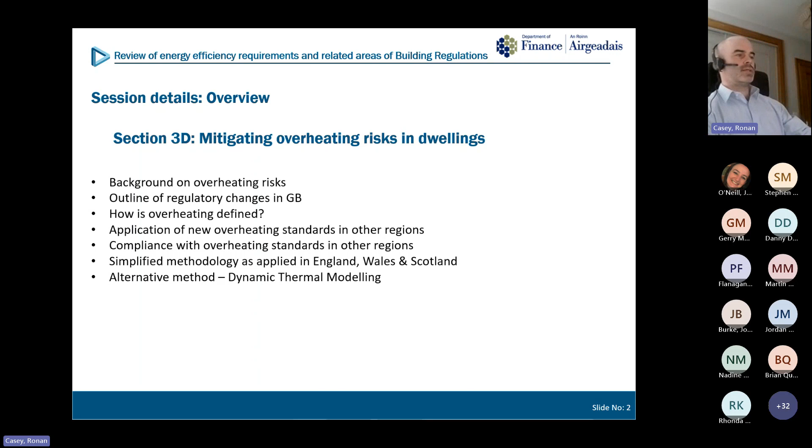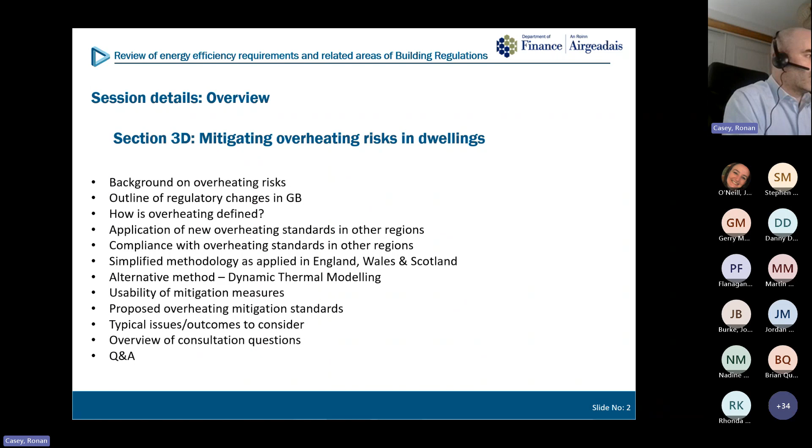This is a brief overview of what we're going to go through today. Firstly, a background on overheating risks, an outline of regulatory changes in GB. We'll look at how overheating is defined, the application of new overheating standards in other regions, and compliance with overheating standards in other regions. We'll go through the simplified methodologies as applied in England, Wales and Scotland. We will look at the alternative method, which is dynamic thermal modelling. We will discuss the usability criteria in relation to mitigation measures. We will overview our own proposed overheating mitigation standards. We will discuss the typical issues or outcomes to consider. Towards the end, we will provide an overview of the consultation questions. And finally, we will hopefully have time to address any questions you may have.

To begin and provide some background on the mitigation of overheating, this section considers the introduction of overheating mitigation standards to the building regulations and associated technical booklet guidance as part of the next phase 3 uplift. The background to this is the report provided by the EAC back in 2018 when they held an inquiry into heat waves and their impact on the UK. The outcome was that their final report recommended that government should create a new regulation to stop buildings being built which are prone to overheating.

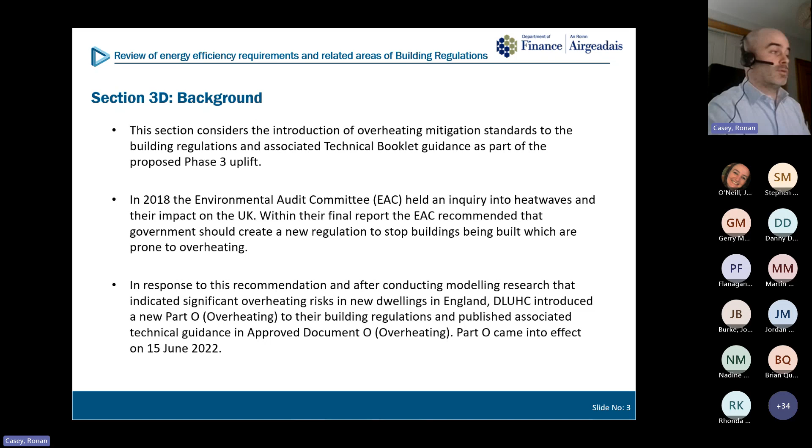In response to that, England have pushed on. They have conducted some modelling, some further research that indicated that overheating risks in new dwellings in England were quite high, and last year, as part of their uplift, they introduced a new Part O overheating regulation and supporting guidance, Approved Document O, which came into effect in June last year. Again, Wales have pushed on, and as part of their uplift late last year, they introduced a new overheating standard, Part O, in November 2022. And again, Scotland introduced a new standard towards the end of last year.

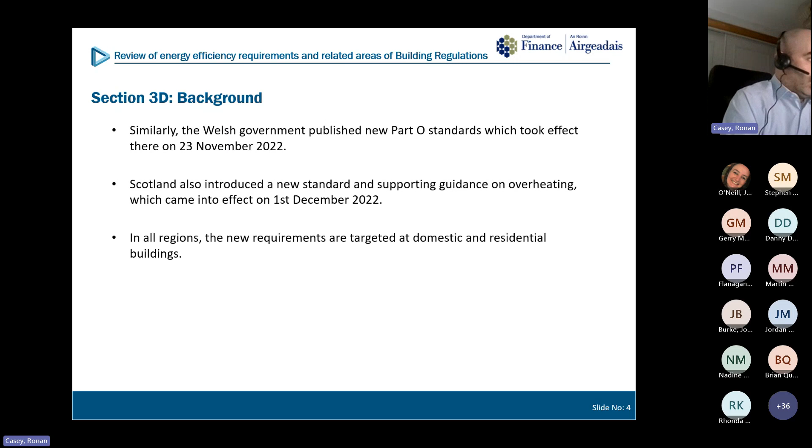In all regions, the new requirements are targeted at domestic and residential buildings. In terms of regulatory changes in GB, the new regulation in England is typical of the requirements in all regions, and it requires the following.

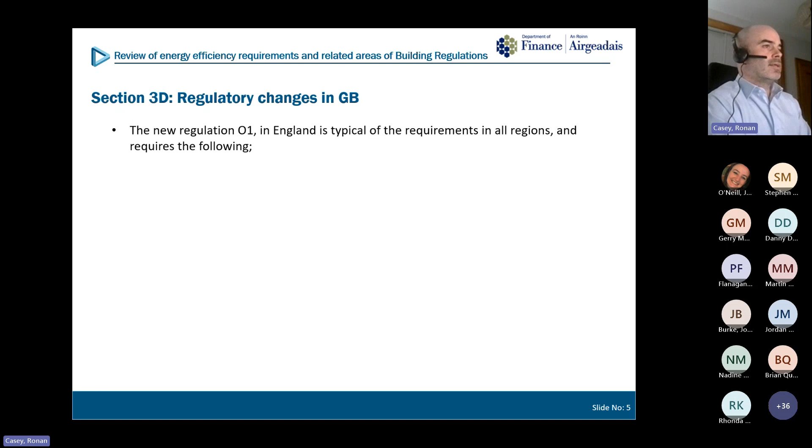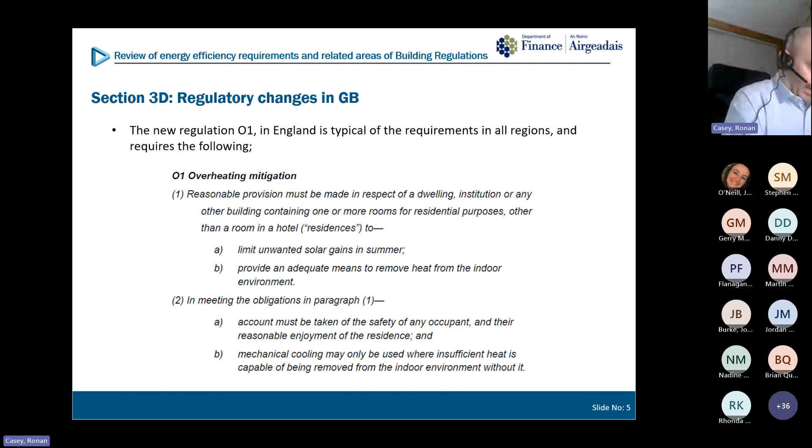Firstly, reasonable provision must be made in respect of a dwelling, institution or other building containing one or more rooms for residential purposes, other than a room in a hotel. Part 1A is to limit unwanted solar gains in summer, and secondly, to provide adequate means to remove heat from the indoor environment. In meeting paragraph 1, account must be taken of the safety of any occupant and the reasonable enjoyment of the residence. And mechanical cooling may only be used where insufficient heat is capable of being removed from the indoor environment without it. So we want to encourage passive means as much as possible.

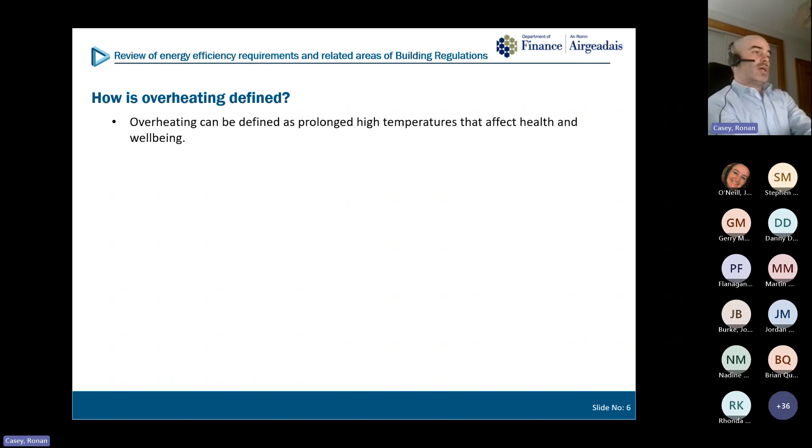So how is overheating defined? Overheating can be defined as prolonged high temperatures that affect health and well-being.

CIBSE have developed the TM59 methodology, the latest methodology provided for the assessment of overheating risks in homes. The TM59 methodology sets out 2 compliance criteria which both need to be met to prevent overheating in naturally ventilated homes. Criterion A applies to living rooms, kitchens and bedrooms. It requires that the internal temperature does not exceed a defined comfort temperature by 1 degree or more for more than 3% of occupied hours over the summer period. Criterion B applies to bedrooms only and requires that the internal temperature between 10 p.m. and 7 a.m. shall not exceed 26 degrees for more than 1% of annual hours.

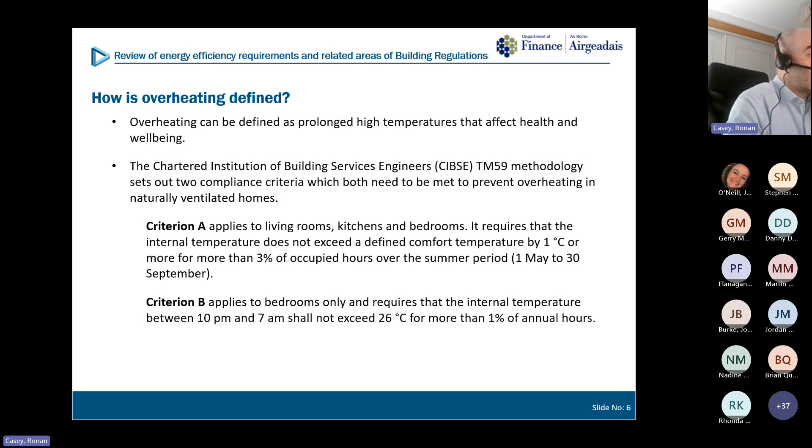Homes only need to overheat for part of the time for these criteria to not be met. To exceed Criterion B, a bedroom would typically only need to exceed 26 degrees overnight for 33 hours per year, which could occur during a week-long heat wave. The extent of any mitigation measures depends on how much of the criteria have been exceeded, taking into account the scale of elevated temperatures, the duration, and the time of day they occur. The dwelling is deemed acceptable if both criteria are met. If one or both are not met, mitigation measures are deemed necessary.

Application of overheating standards in other regions.

Firstly, in England, the new overheating guidance applies to residential buildings only. This includes dwellings and other types of residential accommodation, such as care homes and student accommodation.

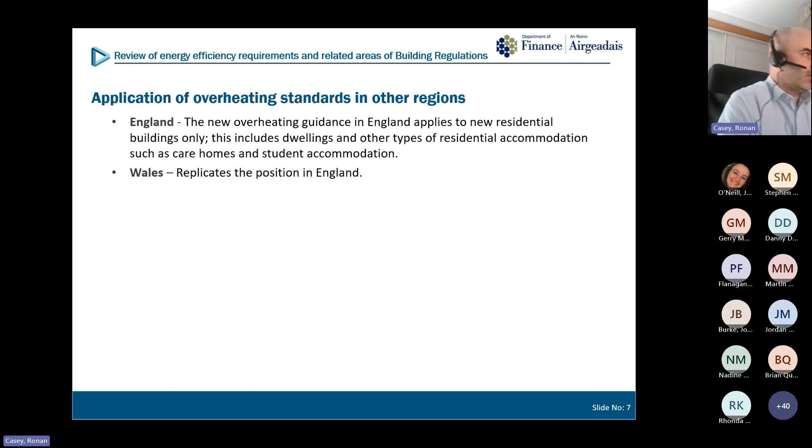Wales replicate the position in England. Scotland's new requirements apply to residential units and shared multi-occupancy buildings. In the case of conversions, they also apply the new overheating standard as far as is reasonably practicable, and in no case be worse than before the conversion.

The Republic of Ireland overheating guidance is included in their Part L, Conservation of Fuel and Power, their TGD. This is similar to the current position in NI. They use their DEAP software, which will flag up dwellings that present an overheating risk. There have been no announcements indicating that ROI intends to introduce standalone overheating guidance outside of DEAP. DEAP will be their equivalent to the SAP software that we use here.

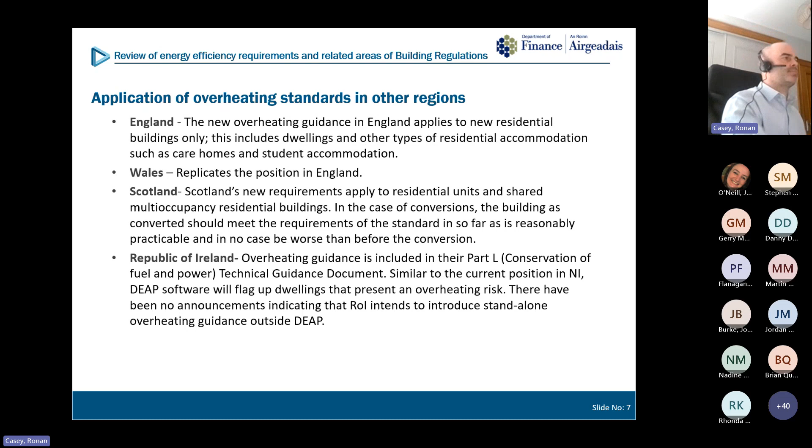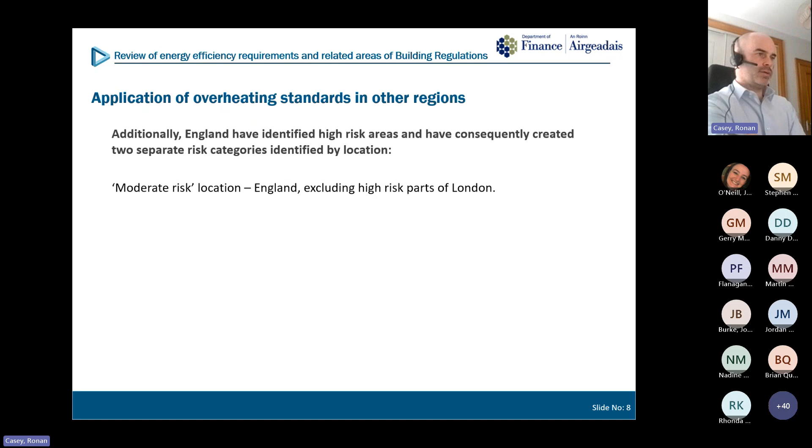Additionally, England have identified high-risk areas and consequently created 2 separate risk categories identified by location. Moderate risk locations, that's most of England, excluding high-risk parts of London. There's an increased risk in London, so they've created this separate high-risk category. So again, that's some urban areas and some suburban areas and parts of London, and I believe also some postcodes within central Manchester are also within the high-risk area or high-risk category.

The department does not consider this high-risk category relevant here, given our local climatic conditions.

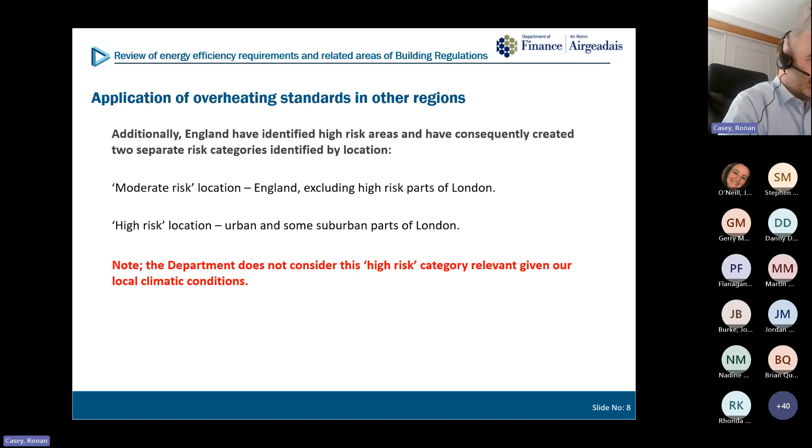Moving on to compliance with overheating standards in other regions. England, Wales and Scotland all offer 2 separate options for assessing and mitigating overheating risks as follows. Firstly, they all offer a simplified method, and alternatively, there is an option to use dynamic thermal modelling.

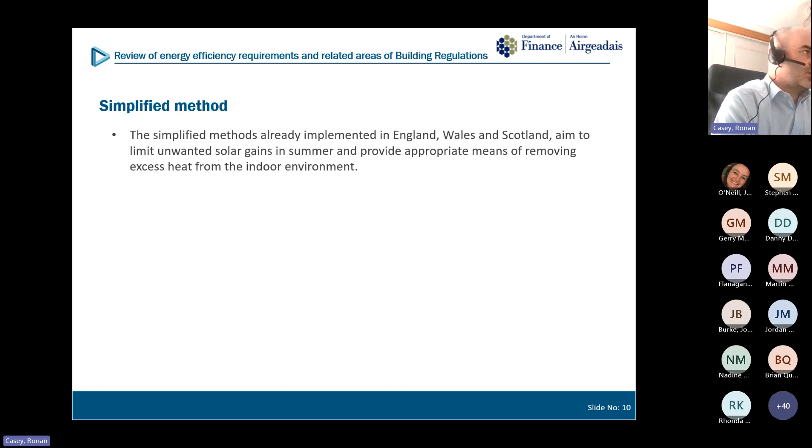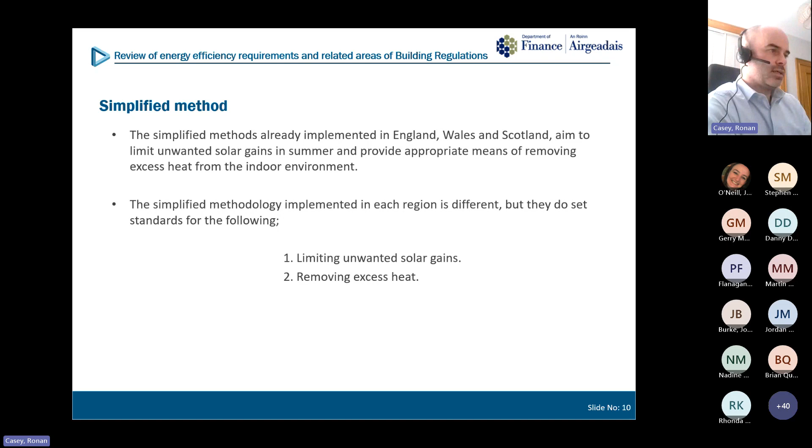The simplified method - there are different methodologies already implemented in England, Wales and Scotland - aims to limit unwanted solar gains in summer and provide appropriate means of removing excess heat from the indoor environment. The simplified methodology implemented in each region is different, but they do set standards for the following: limiting unwanted solar gains and removing excess heat, and assessment is required.

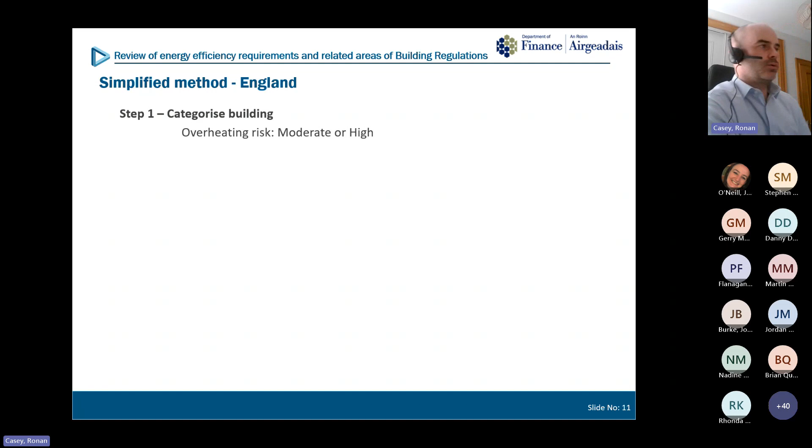We'll move on to look at the simplified method in England. Firstly, step 1 in England, the designers must categorise the building. So overheating risk, is it moderate or high? That will depend on the location. Is the building cross-ventilated or not?

Step 2 is to limit solar gains. So the maximum area of glazing should not exceed ADO table 1.1. Designers would decide here, or they would categorise their buildings. They would see whether table 1.1 for cross-ventilated buildings is applicable. If not, they would look at table 1.2 for buildings without cross-ventilation. You'll see on table 1.1 you have standards set there for high risk locations and also for moderate risk locations.

On review of this table, the first questions that we asked were, how do you define the largest glazed facade? Is that the largest facade with a window? Is it the facade with the largest amount of glazing? Is it the facade with the largest amount of glass to wall ratio? So those are the sorts of queries that we had initially thought about.

In England, orientation is a factor. So again, that largest glazed facade, is that orientated north, east, south or west? And then that would feed into the maximum area of glazing that is allowed. As you'll see on the column on the right hand side for moderate risk locations, 18% glazing to floor area for north, east. South, it reduces to 15 and west down to 11. So there's quite a bit in there for designers to review and to assess.

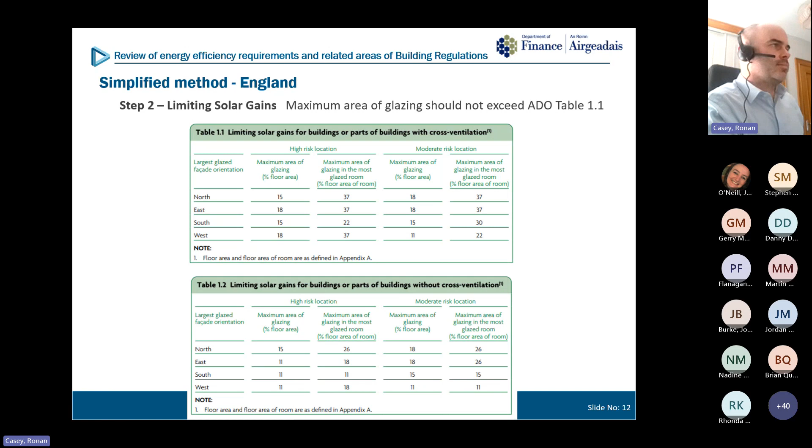Step 3 would be assessment of minimum free areas. This is to ensure that excess heat can be removed. So in high risk locations and moderate risk locations, you will see that total minimum free areas are slightly different. Obviously, in moderate areas, you won't have to remove quite as much heat. Again, with step 3 here in England, you have to assess the minimum free area provided in bedrooms as well. So that's another factor that must be considered.

Again, table 1.3 is for cross ventilated buildings. Table 1.4 is for buildings without cross ventilation.

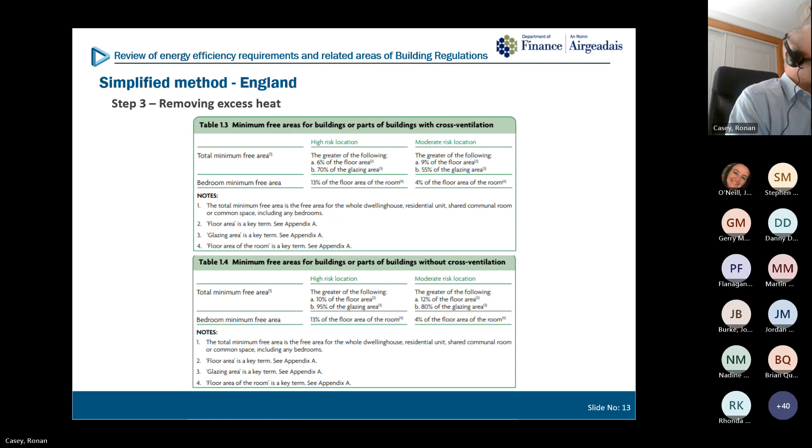You may ask, what free area, what does that mean? So that's the geometric open area of a ventilation opening. This assumes a clear, sharp-edged orifice that would have a coefficient of discharge of 0.62. So you can see where the simplified approach is, in practice it can be quite complicated.

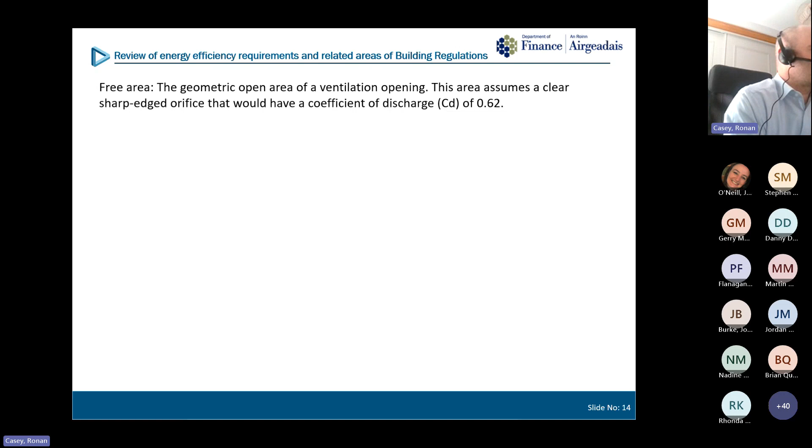When doing this, it takes the development of quite a complex schedule. A window schedule would be more complex than maybe architects or designers would use previously. For example, the glazed area is not the typical structural opening of a window - it's only the glazing itself, it does not include the frame. So typically there would be a frame factor applied to that structural opening, say of 0.7. So those things have to be considered.

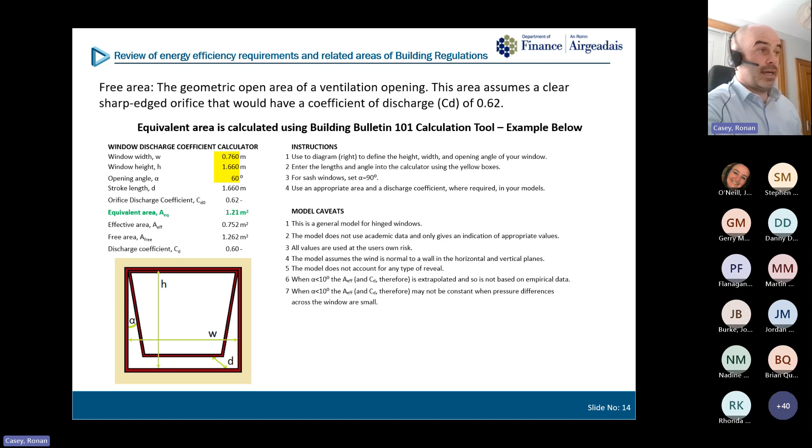And again, G values and so on come into the equation as well. So there's quite a lot in it for architects and designers when they are trying to produce the building control information that's required as part of the simplified method here, using the English approach.

Of course, part of the simplified solution, we would also have to consider usability criteria. So noise at night, pollution, security, protection from falls and protection from entrapment must also be considered. Windows would typically be open for a longer period, they may open larger opening sections, and they may open wider than typically we'd be used to with restrictors and so on. So we have to consider the impact on that for safety, for noise at night, and maybe any pollution concerns there. Usability issues may mean the standards of the simplified method cannot be met.

For example, external noise - it's unlikely that windows will be opened by an occupant at night time, so therefore the free areas as calculated cannot be delivered. In such cases, dynamic modelling should be used as an alternative.

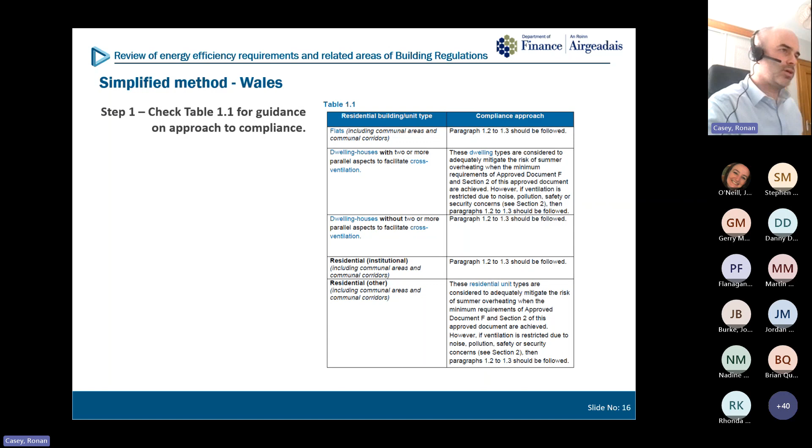In Wales, I would say it's a slightly more user-friendly approach to going through the simplified method. Firstly, table 1.1, designers would categorize their building - is it a flat, a dwelling house with cross ventilation, or a dwelling without cross ventilation? Wales have undertaken some research, and they consider that cross ventilated dwellings adequately mitigate the risk of overheating, provided the minimum purge ventilation requirements of approved document F are achieved.

So for cross-ventilated houses, provided that none of the mitigation considerations are an issue - so that you don't have any noise problems, there's no pollution, safety or security concerns there - it would be okay just to proceed without undertaking a full assessment.

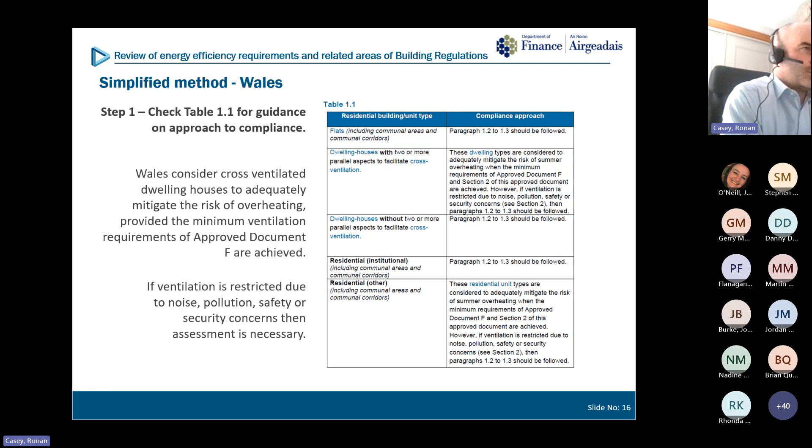Flats, they do see a risk there in terms of overheating - single aspect flats or top floor flats would be probably the dwelling types most at risk here. So in Wales, it would be necessary to go through a full simplified assessment as per paragraph 1.2 and paragraph 1.3.

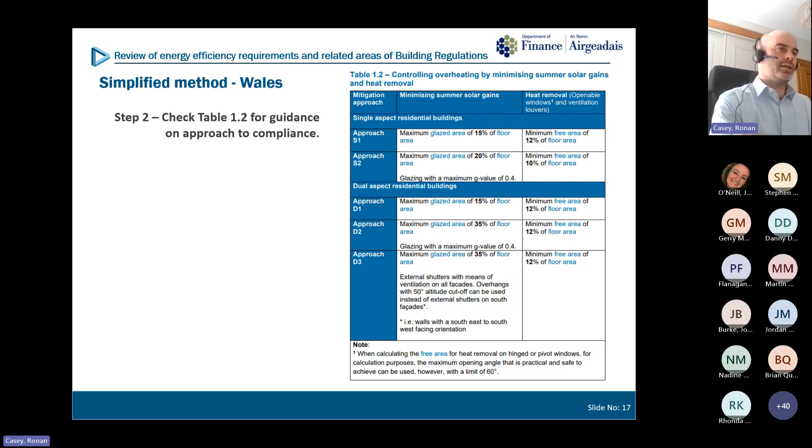Again, necessary to calculate the area of glazing. Wales do not consider orientation, so that makes it simpler for designers when they're going through this approach. And there is no consideration of glazing in the most glazed room.

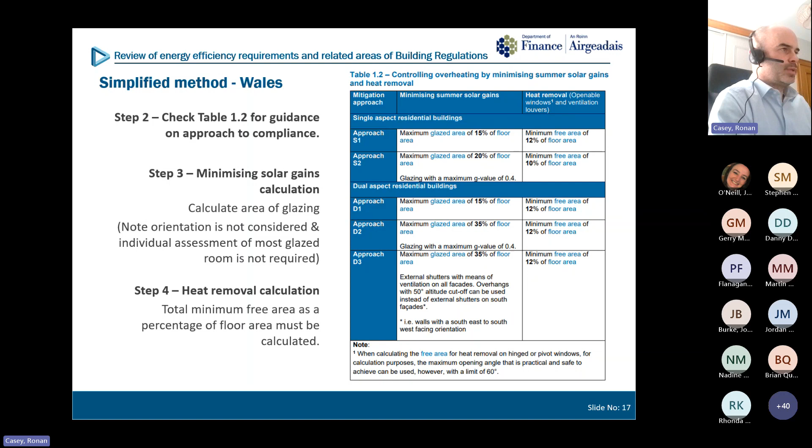Step 4 is the heat removal calculation. So again, total minimum free area as a percentage of floor area must be calculated. Again, in Wales, similar considerations to England - the usability of mitigation measures, noise at night, pollution, security, protection from falls, and protection from entrapment. Again, any issues or concerns there, it may mean that dynamic thermal modelling should be used to achieve compliance.

In Scotland, the simplified method - arguably the most simple of simplified methods. Step 1, limiting solar gain through glazing, assessment required. Scotland assesses what they call an apartment, which is the equivalent here of a habitable room.

So it's not so much a whole dwelling assessment. Each habitable room is assessed individually. Each room that's orientated along the solar path, so east, south, or west, must be assessed, with glazing at a maximum of no greater than 20% of floor area of the habitable room. If you want more glass than that, you would need to provide shading such as louvers, external shutters, or revise the G value to reduce the solar gain in proportion to the increase in glazing area.

So that's the approach in Scotland. It will be on a room by room basis for rooms that are orientated to the solar path. So it is a more straightforward approach. Bedrooms and most glazed rooms are not, well, all rooms are assessed, so that's irrelevant.

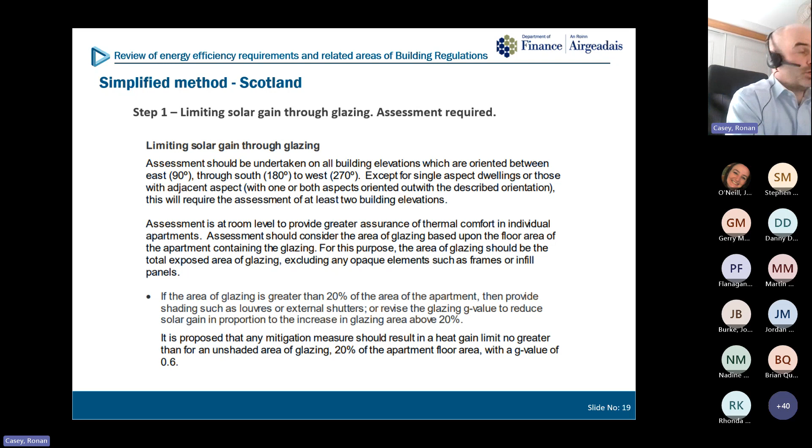Step 2 would be ventilation to assist with cooling. Assessment should be undertaken on all dwellings based upon the number of exposed facades and arrangement of openings which provide ventilation to apartments or other habitable spaces as follows.

So again, cross ventilation and buildings without cross ventilation has a big impact on the ability to remove heat. Where a building is cross ventilated, so that's two elevations which are parallel with ventilation openings distributed so that neither has less than 1/3 of the combined opening area, no further action is required. So Scotland lean more on their purge ventilation requirements elsewhere in their technical handbook, the standards. So there's no specific requirement here to provide additional assessment for overheating. They're content that the purge ventilation requirements required elsewhere is enough to remove any excess heat and to mitigate overheating. So that's a big help there for designers.

In single aspect rooms, without the ability to cross ventilate, it would be necessary to increase the purge ventilation by 50%. That's just to provide some additional ability there to remove excess heat. So that's the approach in Scotland.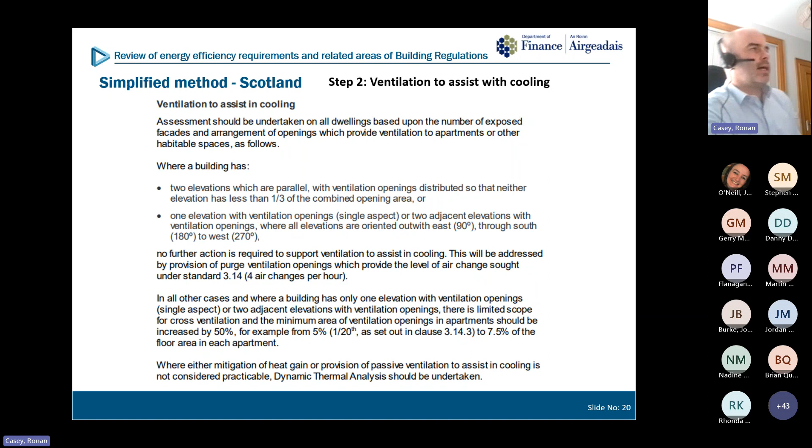Probably the most user-friendly approach for designers, and in terms of developing building control documentation. Again, in Scotland, similar to Wales and England, we have the usability of mitigation measures. So noise at night, pollution, security, protection from falls, and protection from entrapment - they must all be considered. Things like noise, pollution, if they're raised at planning stage, it will be up to designers to mitigate around those issues and deal with those problems. Any usability issues, again, the alternative means to compliance would be to thermally model a solution there.

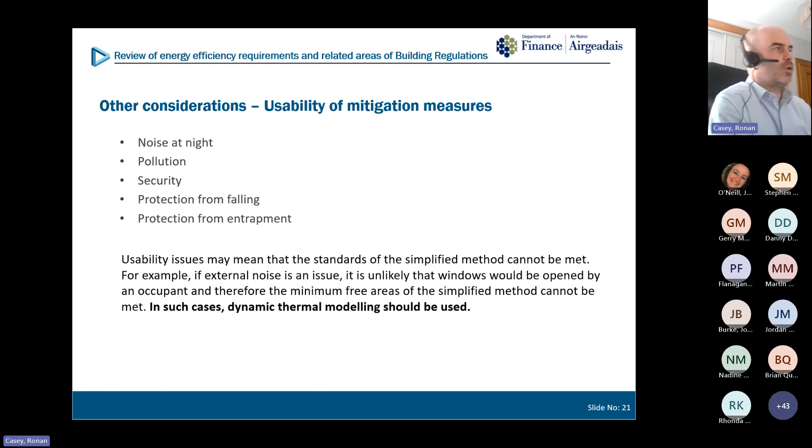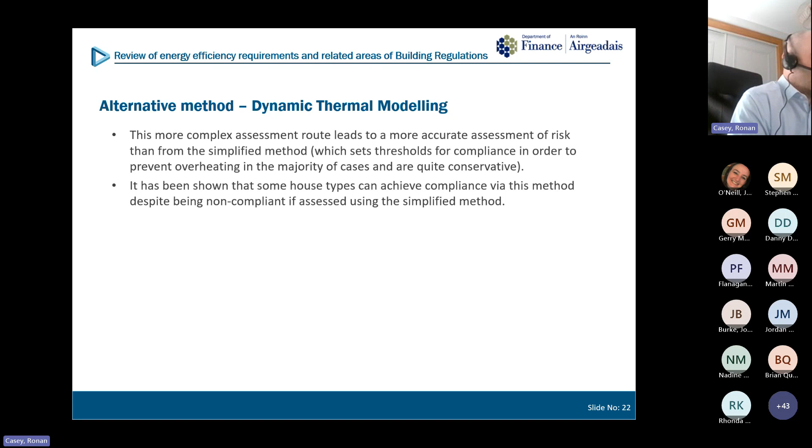To expand upon the alternative method, which is dynamic thermal modeling to CIBSE's TM59 methodology, this is a more complex assessment route, and it leads to a more accurate assessment of risk than the simplified method, which sets thresholds for compliance in order to prevent overheating in the majority of cases, and those thresholds are quite conservative. It has been shown that some house types can achieve compliance via this method despite being non-compliant if assessed using the simplified method. Again, that's to do with the conservative approach when using the simplified method.

It is possible to achieve a more refined solution using dynamic thermal modeling. So yeah, you have more options there to specify solar shading and shutters and so on. So it's more complex. I believe it also takes account of the thermal mass and the construction of the building. So yeah, it's a more complex approach, and designers can tweak that to find a solution that best suits their needs.

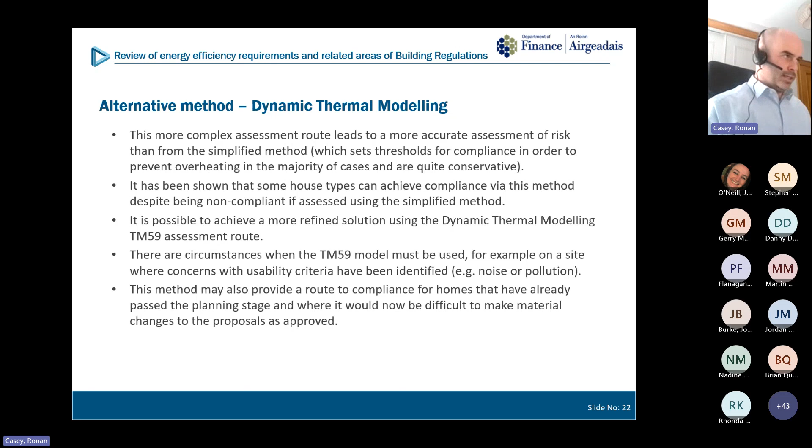There are circumstances when TM59 model must be used. For example, as we said, on a site where concerns with usability criteria have been identified, such as noise or pollution, security also. This method may also provide a route to compliance for homes that have already passed the planning stage and where it would be difficult to make material changes to the proposals as approved. So if you've already achieved planning and you're going into building control after any new overheating regulation has been introduced, you may choose to use this method to achieve compliance with the new standard. It will avoid you going back through the planning process there and maybe reducing glazing size or introducing solar shading and so on.

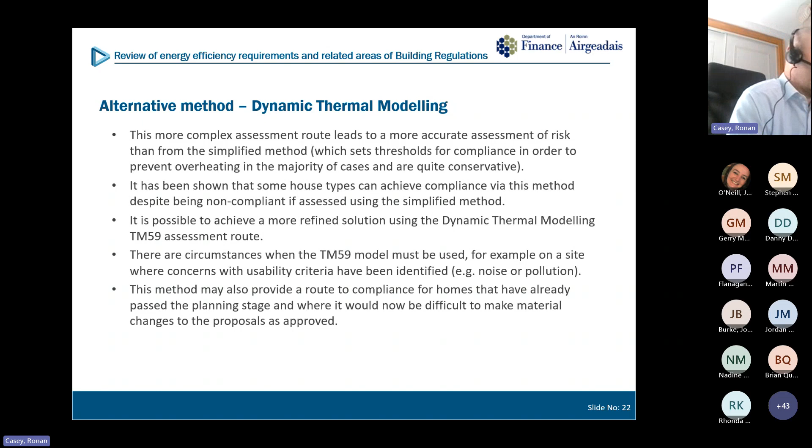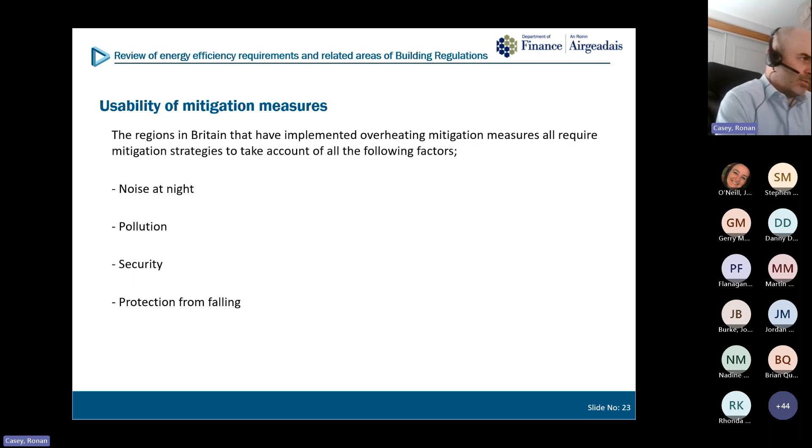Usability of mitigation measures. So we'll look in a bit more depth here at those usability factors. England, Scotland, and Wales have all implemented similar mitigation measure or similar usability criteria. So all mitigation measures require mitigation strategies to take account of the following factors. Firstly, noise at night. Secondly, pollution, security, protection from falling, and protection from entrapment.

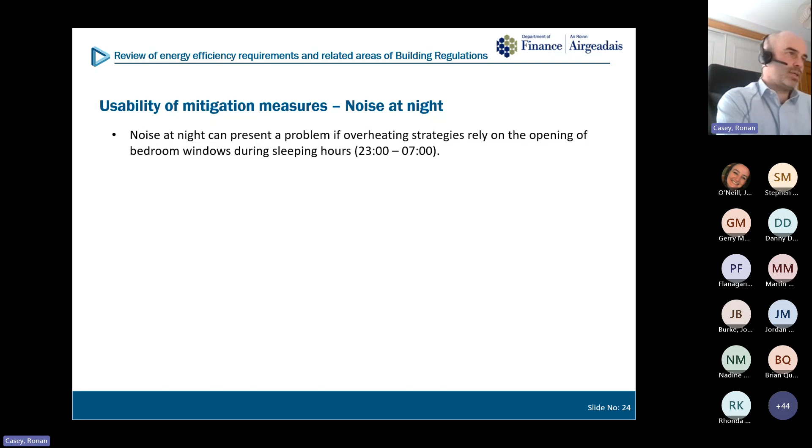We'll take a look or a run through firstly noise at night. So noise at night can present a problem if overheating strategies rely on the opening of bedroom windows during sleeping hours from 11 p.m. to 7 a.m. If noise is identified at planning stage, overheating strategies should take account of the likelihood that windows will be closed during sleeping hours.

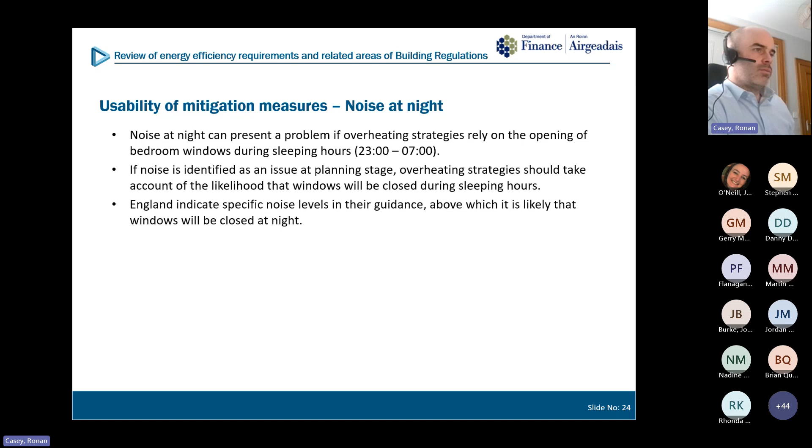England indicates specific noise levels in their guidance, above which it is likely windows will be closed at night. Wales require designers to consider noise generated by mechanical ventilation measures, if applicable. This is an extract from Approved Document O in England: windows are likely to be closed during sleeping hours if noise within bedrooms exceeds the following limits - 40 decibels averaged over 8 hours during the period of 11pm to 7am, or over 55 decibels more than 10 times a night during the same period. So England have been quite specific there on their noise requirements.

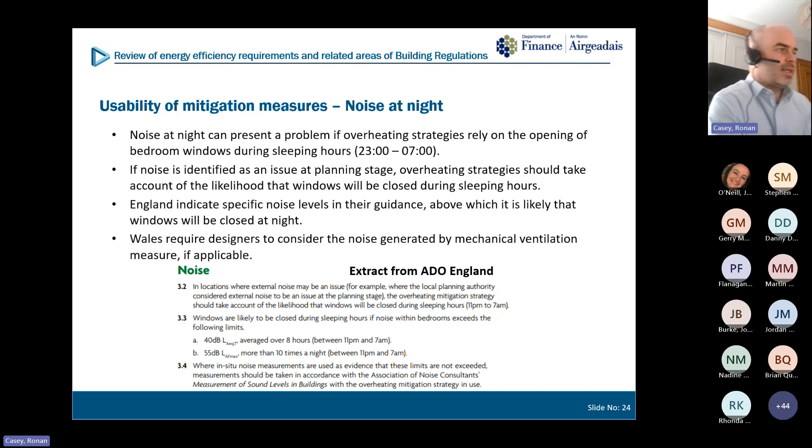Wales or Scotland haven't included any sort of decibel limits like that within their own regulation or guidance.

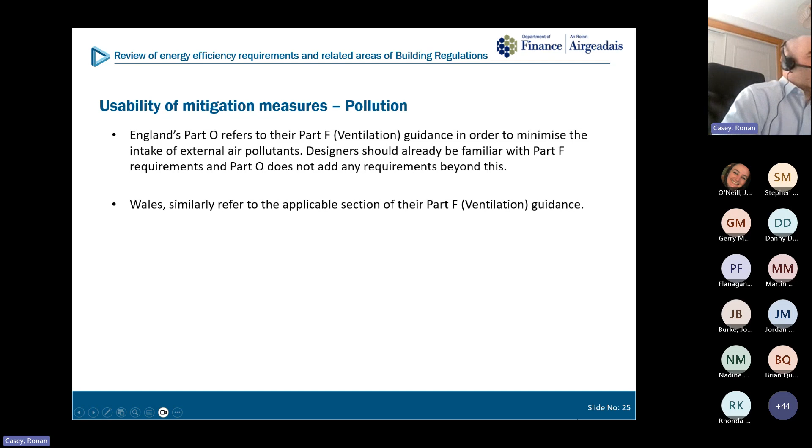Moving on to pollution, England's Part O refers to their Part F ventilation guidance in order to minimise the intake of external air pollutants. Designers should already be familiar with Part F requirements, and Part O does not add any further requirements beyond this. Wales again have replicated this approach. Scotland treats potential pollution concerns in the same way as noise, in that if it is highlighted at planning stage as a material consideration, any proposed overheating mitigation measures should also be cognizant of the problem. So things like pollution and noise, if raised at planning stage, really should be addressed at building control application stage.

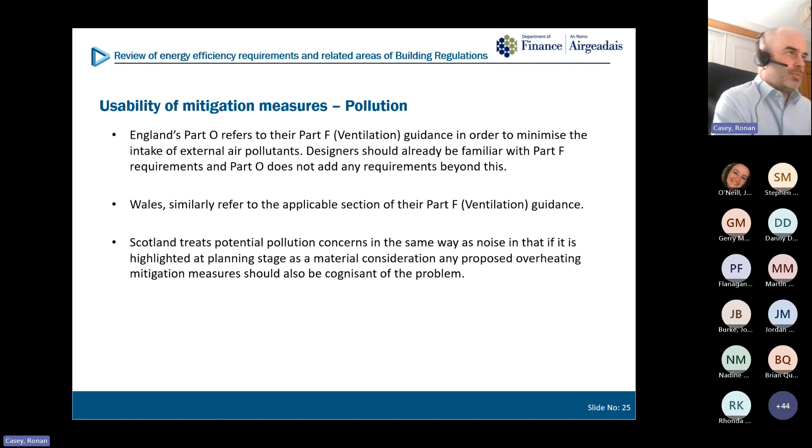Security is a further concern. England require that the free opening area available for ventilation during sleeping hours should only be the amount that can be securely provided, and they highlight ground floor and easily accessible bedrooms as being particularly vulnerable to intrusion by burglars. So security is a big risk there with openable windows and any accessible room really.

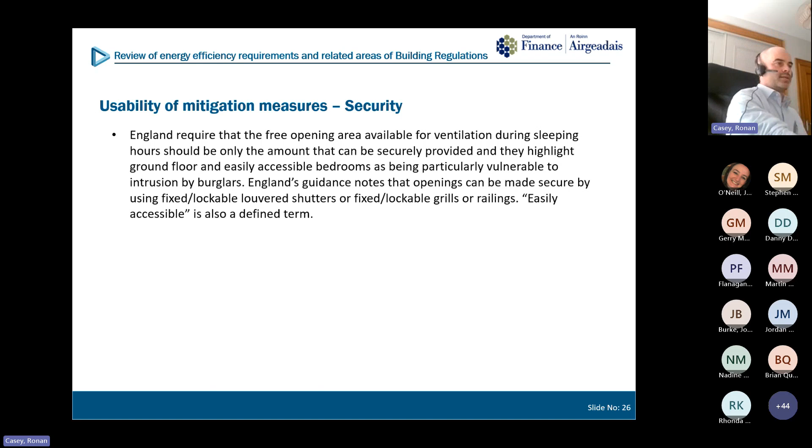England's guidance notes that openings can be made secure by using fixed or lockable louvered shutters, fixed lockable grills or railings. Easily accessible is also a defined term - this is an extract from Appendix A of Approved Document O, England. Easily accessible is a window or doorway, any part of which is within 2 metres vertically of an accessible level surface, such as ground or basement level or an access boundary, or a window within 2 metres vertically of a flat or sloping roof. Again, that's considered to be easily accessible.

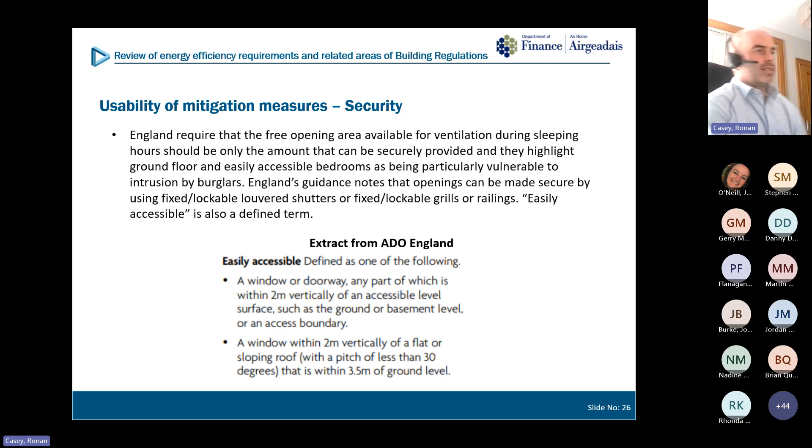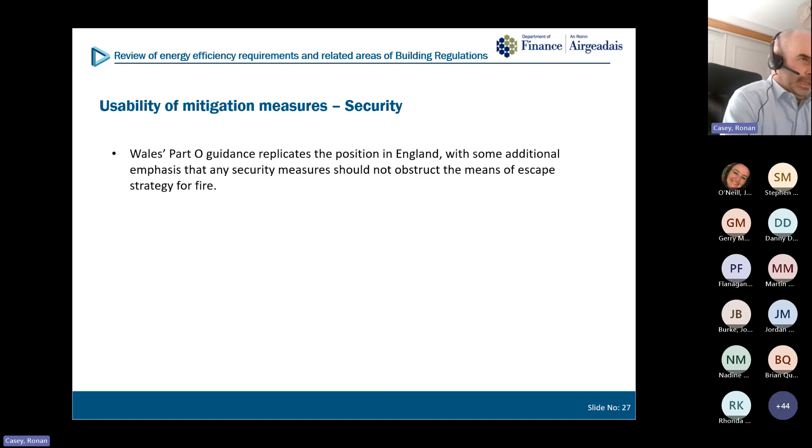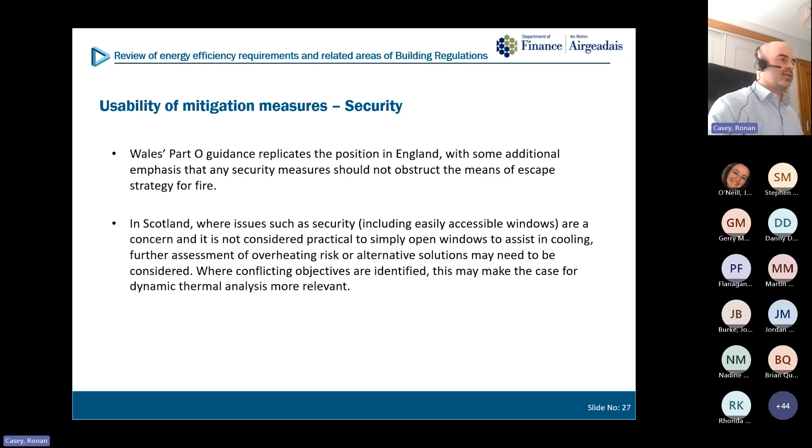Wales Part O guidance replicates the position in England, with some additional emphasis that security measures should not obstruct the means of escape strategy for fire. In Scotland, where issues such as security, including easily accessible windows, are a concern, and it is not considered practical to simply open windows to assist in cooling, further assessment of overheating risk or alternative solutions may need to be considered - again, that's offering the dynamic thermal modelling route to compliance as an alternative.

Protection from falls - England require consideration of window handle reach distances and 1100mm guarding, additional to the normal or previous requirements for permitted guarding or sill height at windows to be provided at 800mm. Wales again replicate the approach in England, but also add that if exceeding the minimum guarding height, this should not impact on the means of escape in the event of fire.

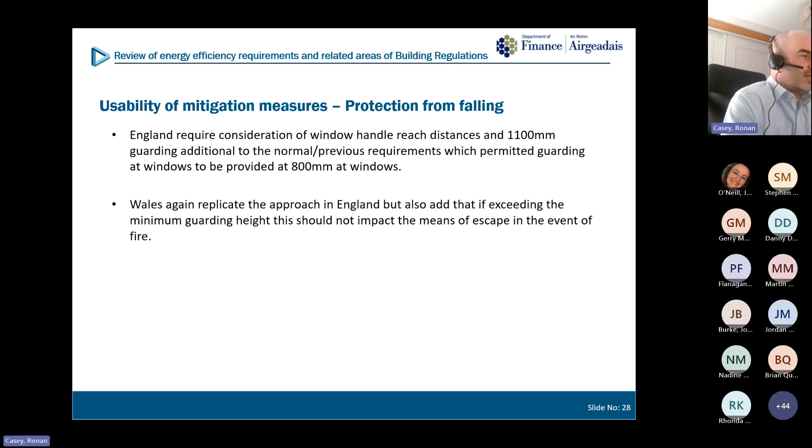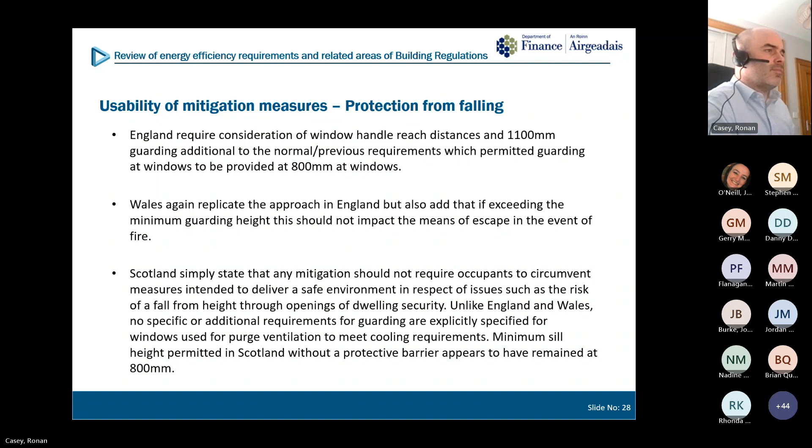Scotland simply state that any mitigation should not require occupants to circumvent measures intended to deliver a safe environment in respect of issues such as risk of fall from height through openings or dwelling security. Unlike England and Wales, no specific or additional requirements for guarding are explicitly specified, so Scotland have retained minimum sill height at 800mm.

Protection from entrapment - England's guidance requires that louvered shutters, railings and grilles should not allow body parts to become trapped, with more detailed requirements provided. This is again an extract from Approved Document O in England, similar maybe to current balustrade requirements. So louvered shutters, railings or ventilation grilles should not allow the passage of a 100mm diameter sphere. Any hole which allows the passage of an 8mm diameter rod should also allow the passage of a 25mm diameter rod. Such holes should not taper in a way that allows finger entrapment.

In addition, any looped cords must be fitted with child safety devices. Wales again replicate this position, and Scotland's previous position in relation to delivering a safe environment will presumably extend to protection from entrapment.

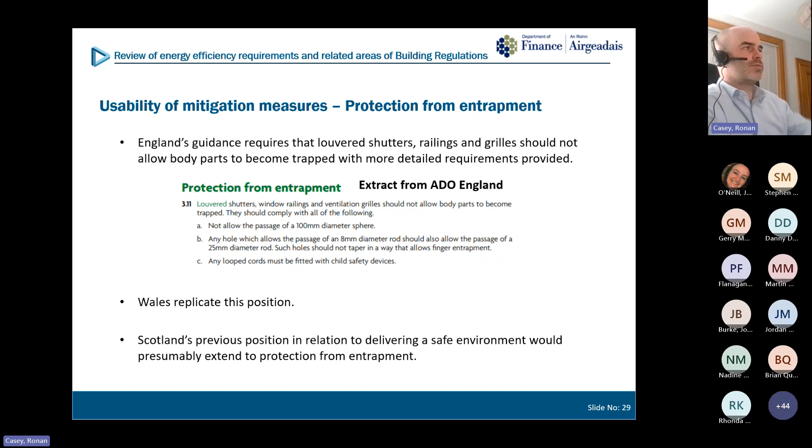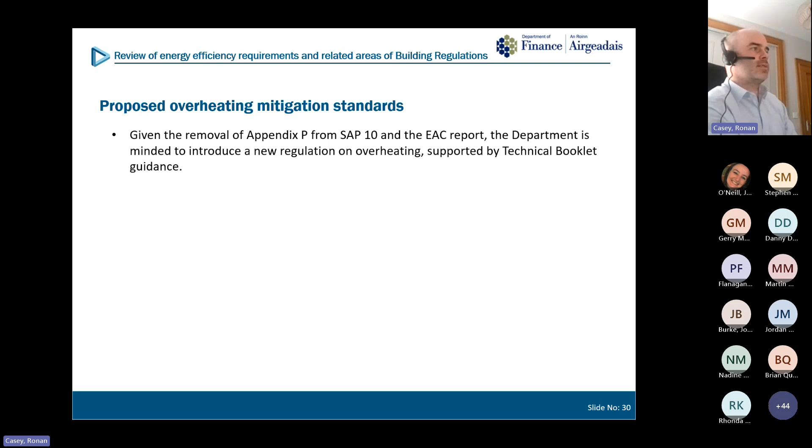So, proposed overheating mitigation standards - given the removal of Appendix P, that's the assessment of overheating that we currently have in SAP 2009, that's removed in SAP 10. Given the EAC report, the department is minded to introduce a new regulation on overheating supported by technical booklet guidance. The department expects to work on the basis that only a low to moderate risk of overheating assumption would be applicable across the region, given evidence from the Irish government's research. We don't believe there are any high risk areas within Northern Ireland. The department currently considers that Scotland's approach is the most practicable, and that a similar approach will be proportionate given presumed similarities in climate data.

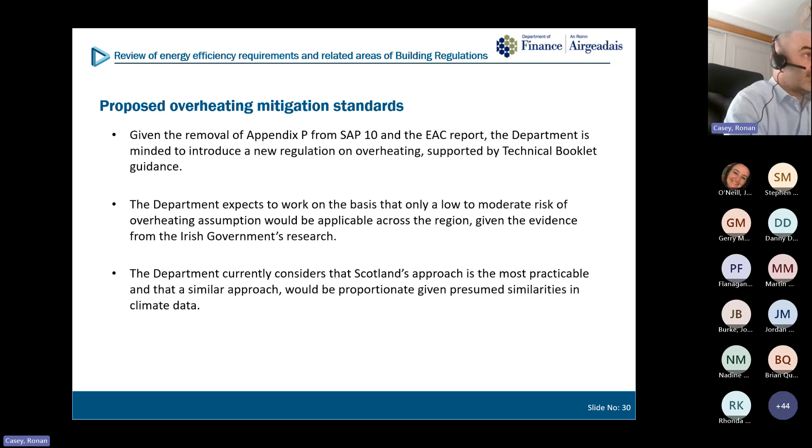The simplified approach would require assessment of each room facing west, south or east, such that glazing is limited to 20% of total floor area of the room, or an equivalent reduction supported by shading or a lower G value for the glass. Secondly, in dwellings or relevant residential spaces where cross ventilation is not possible, or where rooms are not facing north, openings for purge ventilation are increased by 50% beyond that which would be required for rapid or purge ventilation for Part K requirements. Usability criteria would also apply, as we've discussed previously.

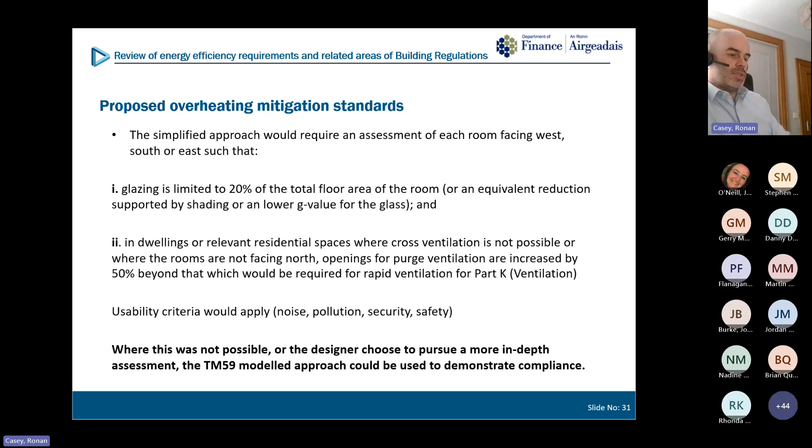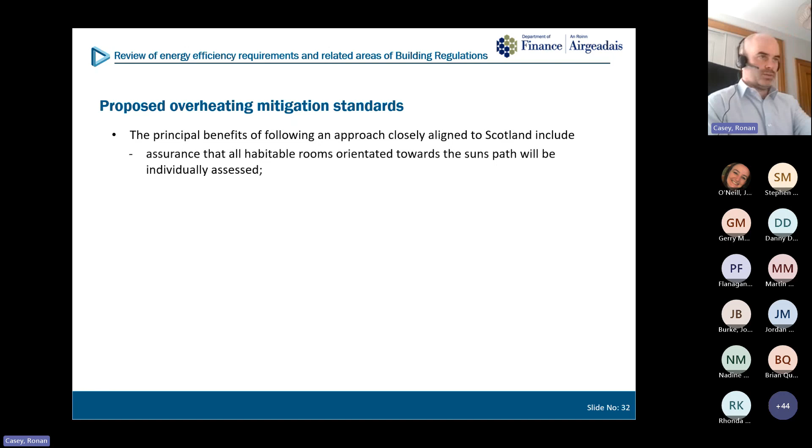Again, where this is not possible, or the designer may choose to look more in depth at their mitigation strategy, the TM59 modelled approach could be used to demonstrate compliance. The principal benefits of following an approach closely aligned with Scotland include assurance that all rooms orientated towards the sun path will be individually assessed.

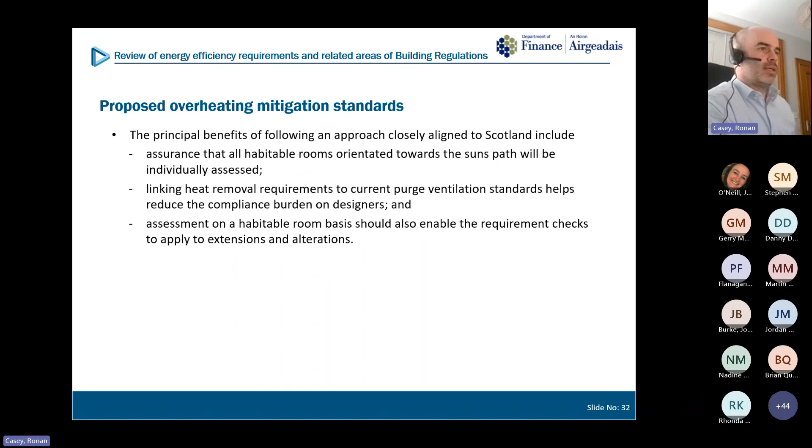Linking heat removal requirements to the current purge ventilation standards helps to reduce the compliance burden on designers. Assessment on a habitable room basis should also enable the requirement checks to apply to extensions and other alterations. The current Part K ventilation guidance already requires a minimum of 4 air changes per hour of rapid purge ventilation to habitable rooms in dwellings, and is the equivalent of England, Scotland and Wales.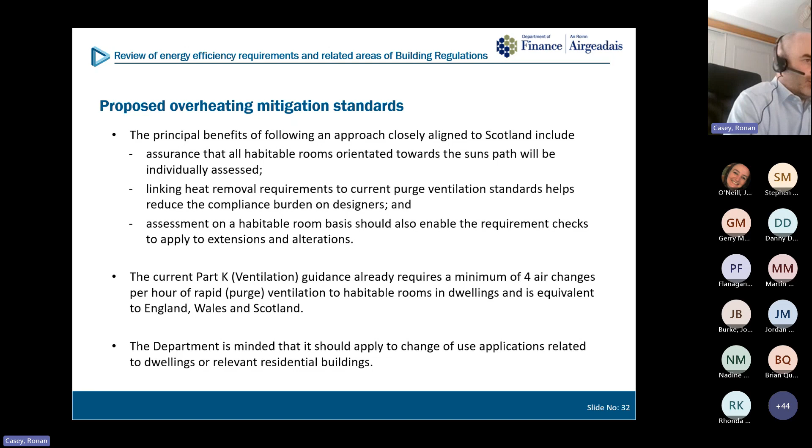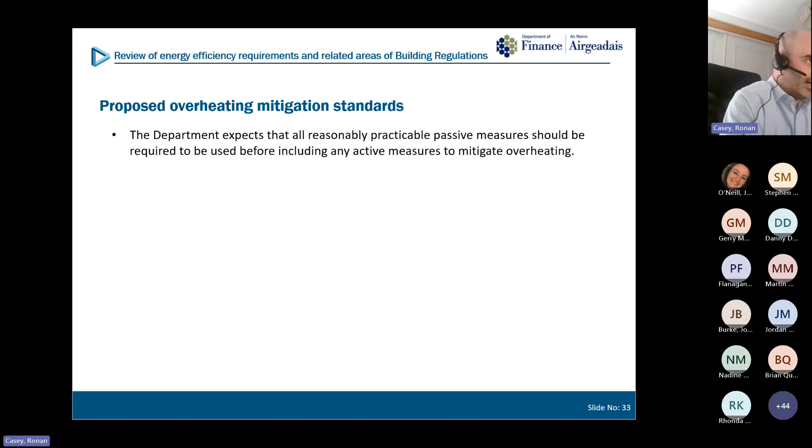So again, that would hopefully provide a user-friendly solution here to mitigating overheating. The department is minded that it should apply to change of use applications related to dwellings or relevant residential buildings. The department expects that all reasonably practicable passive measures should be required to be used before including any active measures to mitigate overheating. So passive measures as opposed to going with air conditioning or any other measures that would increase the energy load for that dwelling.

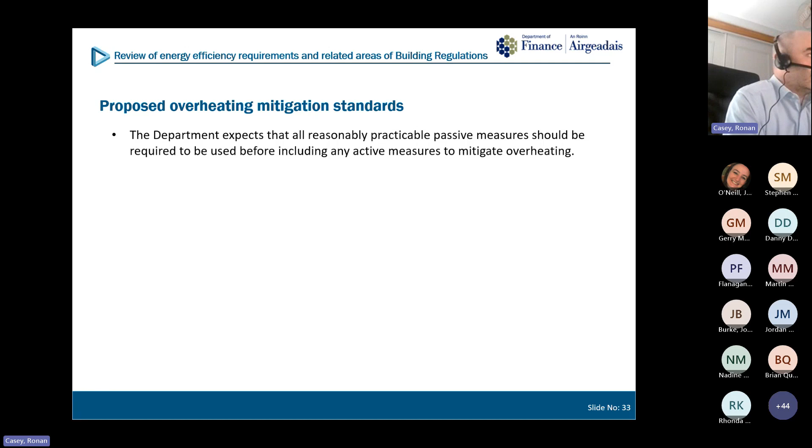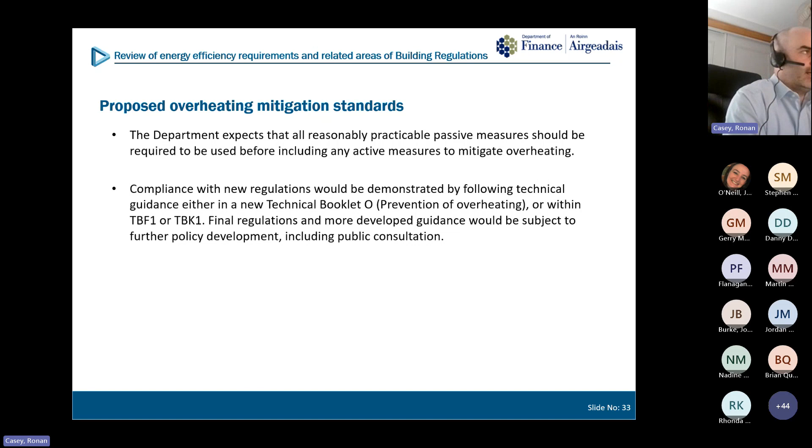Compliance with new regulations would be demonstrated by following technical guidance either in a new technical booklet O, or it could be incorporated within our existing or what will be developed TBF1 or TBK1 guidance. Final regulations and more developed guidance would be subject to further policy development, including public consultation. So there would be a further consultation as part of phase 3 before any introduction here of an overheating regulation and guidance.

Typical issues to consider. The Future Homes Hub provides additional information on achieving compliance to England's Part O standard. They have quite a few documents on their website there. The link is provided. So they go through the simplified approach in England. They also look at the dynamic thermally modelled approach. They look at the impact on building design.

Certainly a fairly significant impact there for parts of London there in the higher risk areas. Glazing significantly reduced, sill heights are raised. It has quite an impact on the building aesthetic in London. So worth checking out and having a review of their documents.

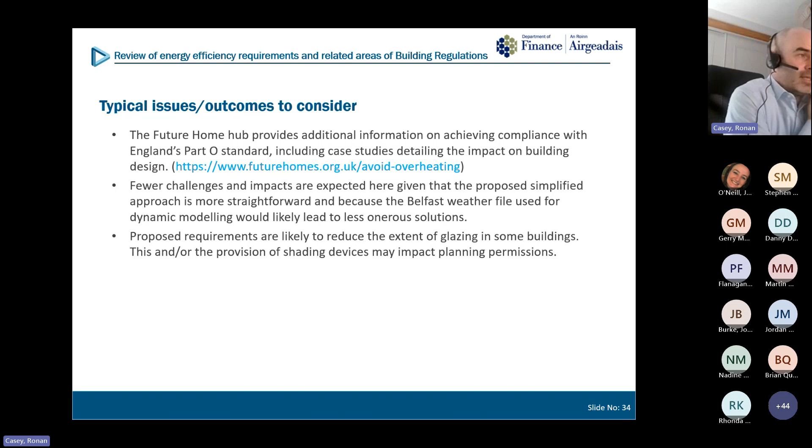Fewer challenges and impacts are expected here, given the proposed simplified approach is more straightforward, and because the Belfast weather file used for dynamic modelling is likely to lead to less onerous solutions. Proposed requirements are likely to reduce the extent of glazing in some buildings. This and/or the provision of shading devices may impact planning permissions, as discussed previously.

Mechanical cooling may be required in some circumstances if passive measures are inadequate to purge heat. The proposed guidance would seek to minimise this, requiring that all reasonably practicable passive measures have been employed to reduce cooling needs.

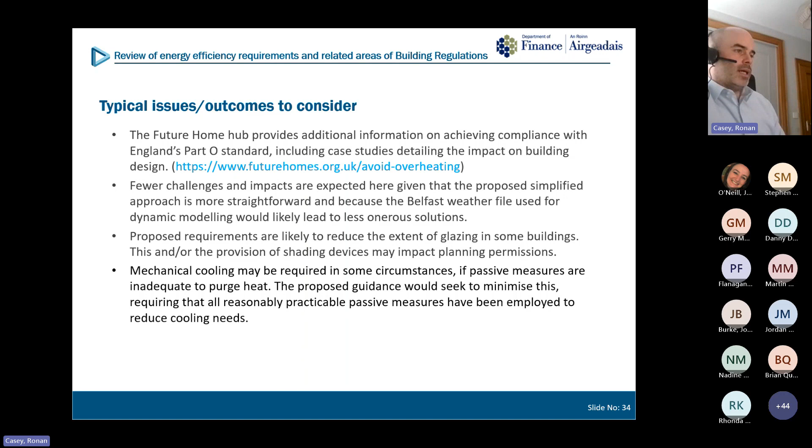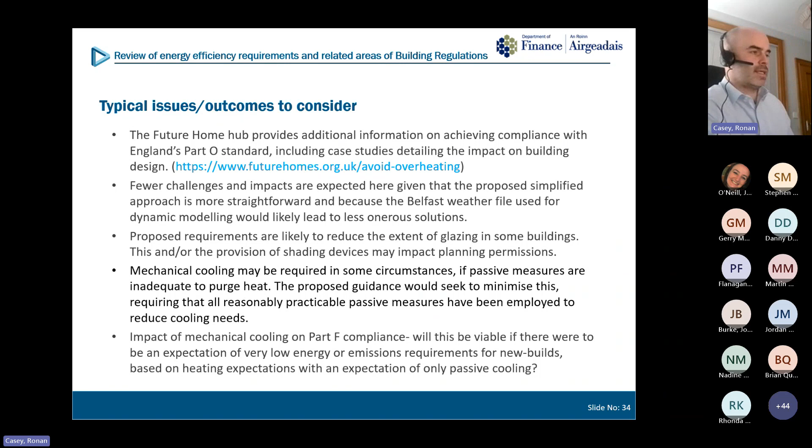The impact of mechanical cooling on Part F compliance. Will this be viable? The notional building spec within SAP does not include any allowance there for mechanical cooling. So if you introduce that, you would have to make some improvements elsewhere, possibly to the building fabric or the efficiency of heating systems. So that must be a consideration for designers if they're choosing to, or it's a necessity to introduce mechanical cooling.

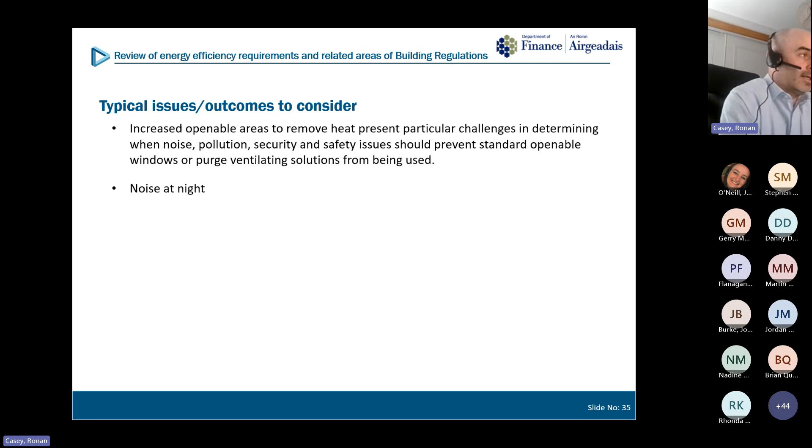Other issues: increased openable areas to remove heat present challenges in determining when noise, pollution, security and safety issues should prevent standard openable windows or purge ventilation solutions from being used. Again, noise at night, pollution, security, protection from falls and entrapment, they must all be considered.

If raised at planning stage, designers will need to provide a solution for at building control stage and present that as part of their package there to building control bodies. And more detailed consideration of these usability issues will be required in further policy development stages.

We have a number of questions within the consultation document. I believe we've got 9 questions. I won't go through them all today, but they're on the screen there. They're available within the consultation document, which you can download from our website.

Things like, do you agree that local regulation guidance is needed here to mitigate overheating? And questions are relating to the proposed approach that we have outlined within that document.

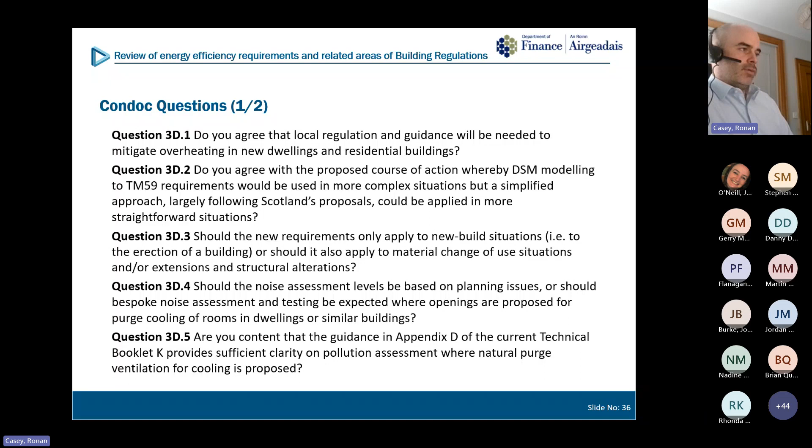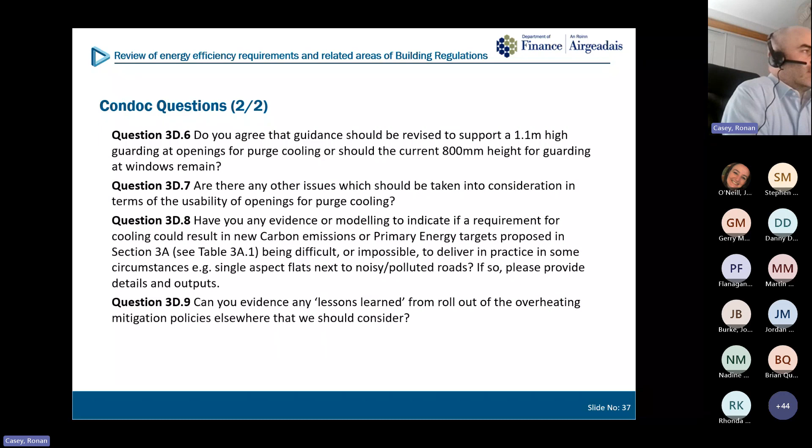Again, the last 4 questions there, and we encourage you to provide or to answer all these questions and provide any feedback or any experience that you have with overheating mitigation within England, Scotland or Wales to date, and any lessons learned. So that leaves us or moves us on to any questions that we may have, John, within the Q&A box.